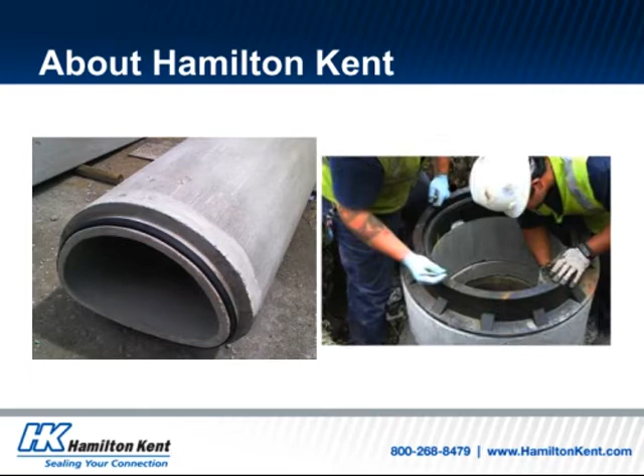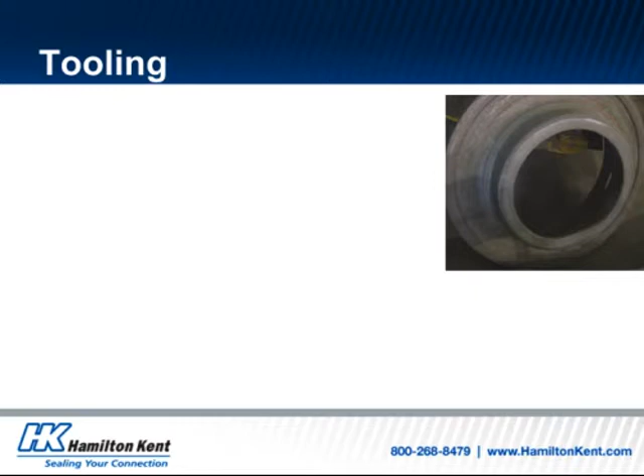Today we will be talking about tooling. As you probably know, tooling is one of the most critical components of pipe and manhole manufacturing and is one of the most important investments you probably manage. Good joints start with the tooling, and when we start with good tooling, everything that comes afterwards is easier and more effective.

The dimensional tolerances, which will be compared to measurements of your tooling, should be provided by your tooling manufacturer and should be checked prior to using the tooling for the first time. Gasket suppliers should also be capable of providing dimensional tolerances if your plant is unable to locate the originals. In the following slides, we'll discuss tooling quality assurance and how you can keep your tooling in good shape for many years to come, which should lead to financial savings for your company.

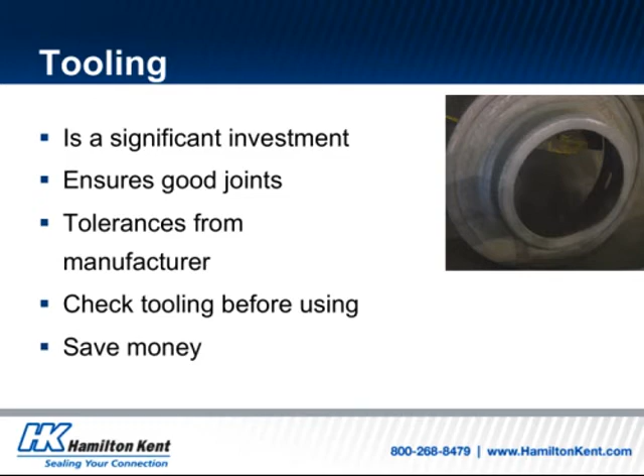QCAST is a voluntary quality assurance program run by the American Concrete Pipe Association, or ACPA. The National Precast Concrete Association, or NPCA, manages a similar program called the NPCA Plant Certification Program. These associations maintain detailed quality control manuals used by the plants who are in their programs and by the third-party inspection agencies which inspect and grade plants on adherence to the respective programs. The NPCA and ACPA have clear requirements when it comes to tooling quality assurance. We will be sharing some of those requirements during this webinar, along with some suggested best practices.

Anytime you purchase or receive new tooling for sanitary products, a detailed inspection needs to be performed. That includes pallets, headers, and shoring rings, whether new, borrowed, or purchased used from another plant. The inspection includes measuring all tooling to ensure all units received are within the tolerance allowed for that particular size. Once the initial inspection has been carried out, records should be kept and maintained for the life of each tooling size and piece. For sanitary pipe, the auditor will want to witness the measuring of the tooling.

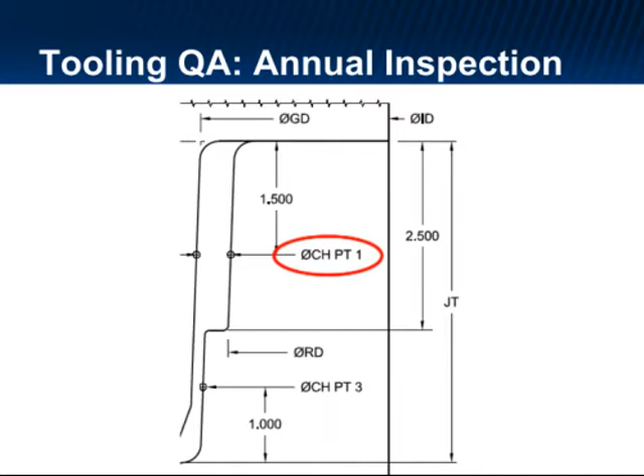A plan for tooling maintenance also needs to be in place, and tooling for sanitary products must be re-inspected annually to ensure any pieces that have been damaged or gone out of spec are identified and either repaired or replaced. As you can see in this drawing, a checkpoint has been established, as indicated by the red oval, which is 1.5 inches from the end of the spigot. The plant would have received the diameter measurements for each size of tooling from their supplier, so they could confirm it all lies within the specified tolerances.

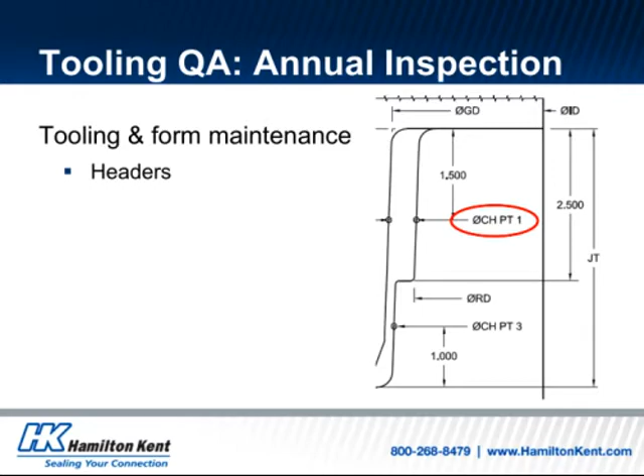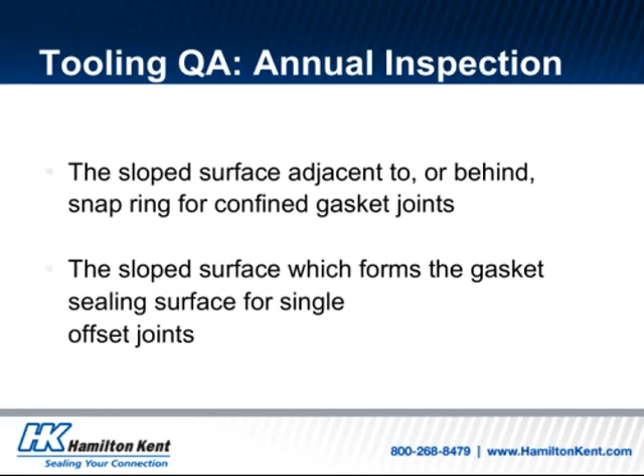Gasketed pipe and manholes manufactured from tooling falling outside of these tolerances will likely either not home properly or not pass water tightness testing. QCAST and plant certification stipulate that annual inspections should be carried out on all components, including headers, pallets, shoring rings, and tongue formers. Annual inspection locations include the sloped surface adjacent to or behind the snap ring for confined gasket joints, or the sloped surface which forms the gasket sealing surface for single offset joints.

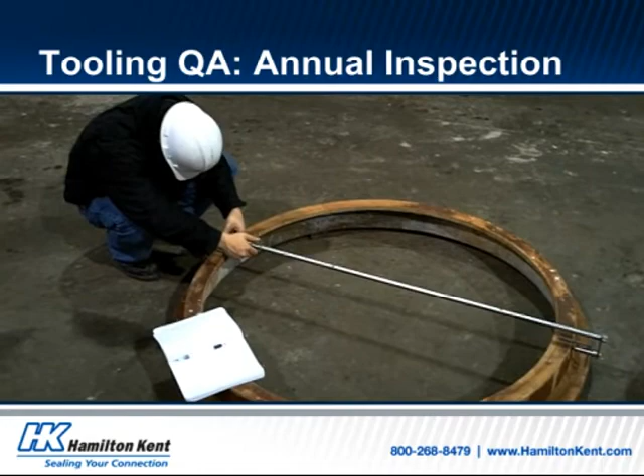In the video, you can see one of our engineers measuring a pallet at a customer's precast plant. This is a service we regularly provide our customers to help them ensure that their joints and our gaskets will perform together as well as possible. For storm pipe, the process is the same as sanitary pipe. All incoming tooling must be measured and detailed reports maintained. However, there is no requirement for annual inspections for storm products, but occasional checks would not hurt.

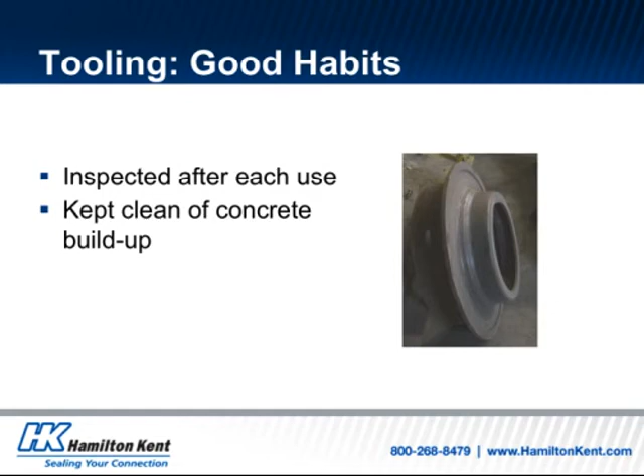Keeping your tooling equipment in good shape can be achieved by developing a few good habits, such as having it visually inspected after each use, ensuring there is no residual concrete on your tooling and that it is kept free of corrosion, wiping or scrubbing down the tooling directly after use to remove form oil and any remaining concrete that is still not hardened onto the tooling, storing the tooling as defined by your tooling supplier, which would mean avoiding storing them in an upright position as pictured here, which can cause warping.

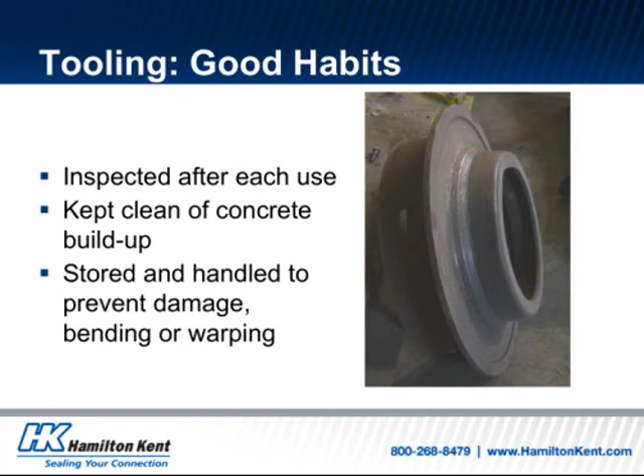Some tooling materials are more susceptible to warping than others, but it is a good idea to treat all tooling carefully. This means care should also be taken when handling and transporting tooling components. Even a short drop to a concrete floor could result in the component being knocked out of tolerance. And finally, storing your tooling indoors, not outdoors, to prevent corrosion and damage.